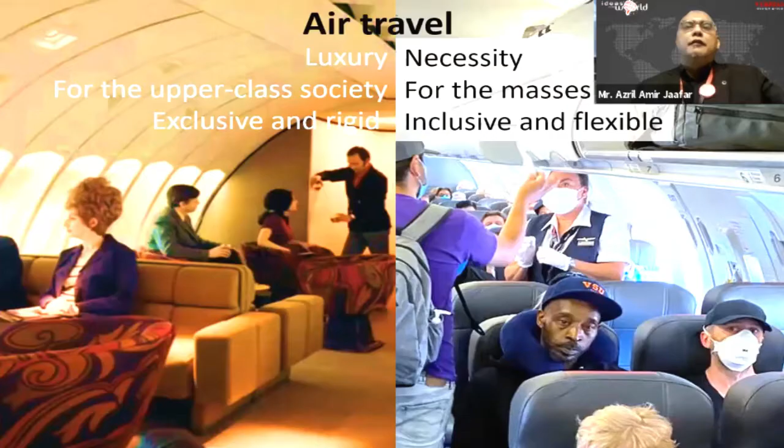Okay, first of all, just now the introduction says that we are based in Kuala Lumpur, and we also have offices in other parts of the world as well. And my India director reminded me before the session not to forget mentioning that we have an office in Mumbai. So yeah, now we have an office in Mumbai as well.

Right, basically, as mentioned, I tried to look at this presentation from a slightly different angle, I think a mass travel mode kind of angle. For example, the first picture that I showed on the screen now is a picture of a Boeing 747 upper deck, probably in the 70s or 80s when it was introduced to the market. I cannot see the whole screen. Anyway, it shows what air travel is all about in the past. It is about luxury, it is for the upper class society, and probably it is too exclusive, and perhaps it is quite rigid. You have to dress a certain manner to be on the plane in the past.

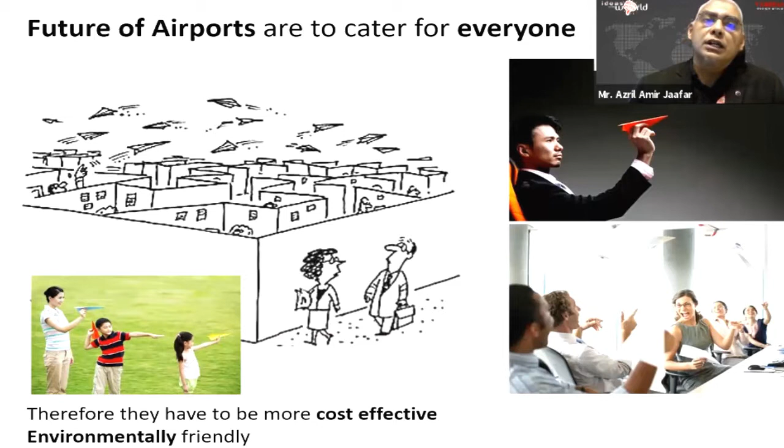Right, nowadays, air travel has become kind of like mass transport in certain countries. It has become a necessity rather, and it is for the masses. And it is more inclusive and quite flexible, actually. Okay, let's see the next slide. The future airports perhaps are to cater for everyone, for the masses, especially in a big country like India, where a lot of people need to travel from one state to another. So the airport has to be more affordable in terms of the operation and running, and it has to be, of course, environmentally friendly. And one of the ways, perhaps, is adopting a sustainable approach.

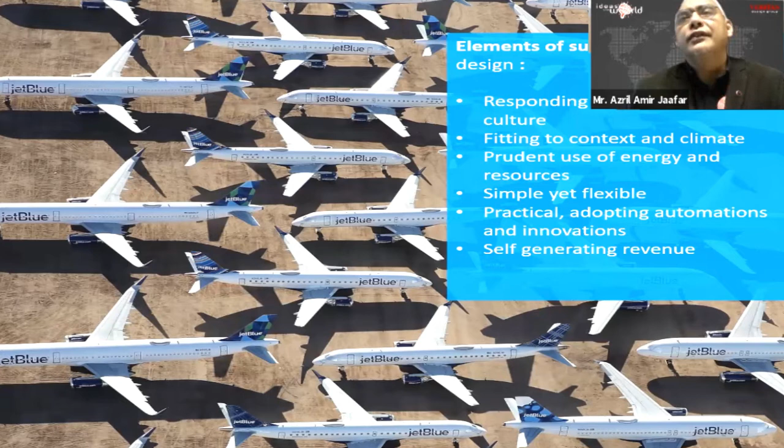Right. What are the elements of sustainability in airport design? I think these are the things that I can think of, and I listed them down for this session. First of all, it has to respond to time, users, and culture. The airport 20 years ago may not be the same now because aviation has changed a lot. Even aircraft preference has changed. The 747 used to be quite preferred in the old days, but nowadays airlines are looking into smaller planes, right? That also affects the airport design. And it has to fit to context and climate. You can't simply generate a design for certain countries. It has to be dedicated for that particular location and country as well.

And related to climate, we have to consider the prudent use of energy and resources. It can be luxury, but in a practical manner. And the most important thing is simple yet flexible, because you don't really build an airport every now and then. But the industry changes quite frequently, so the building itself, the space itself, has to be flexible to adapt to whatever the changes. And then, of course, practical.

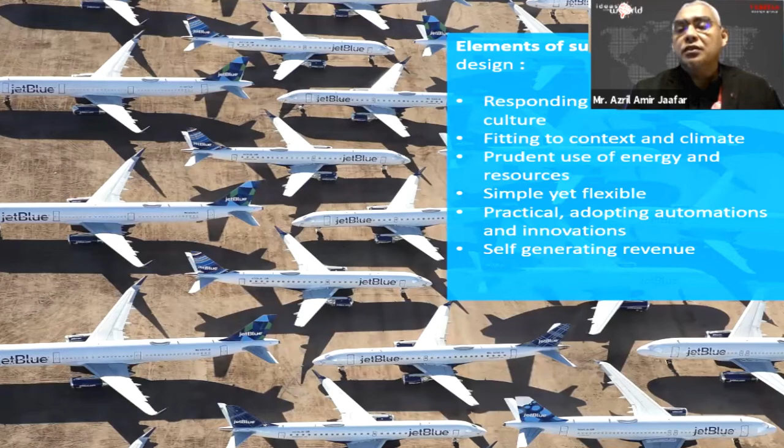I think a few panels mentioned the practicality of airport design, and it has to adopt automations and innovations. This is one of the important components in airport design, automation, because it involves a lot of processes, as well as innovations in terms of the operation. And one of the sustainability factors in airport design as well is self-generating revenue, because the airport, to a certain extent, has become a commercial center that needs to be sustainable in itself. Right. Let's look at the elements, because I will focus on low energy for this session.

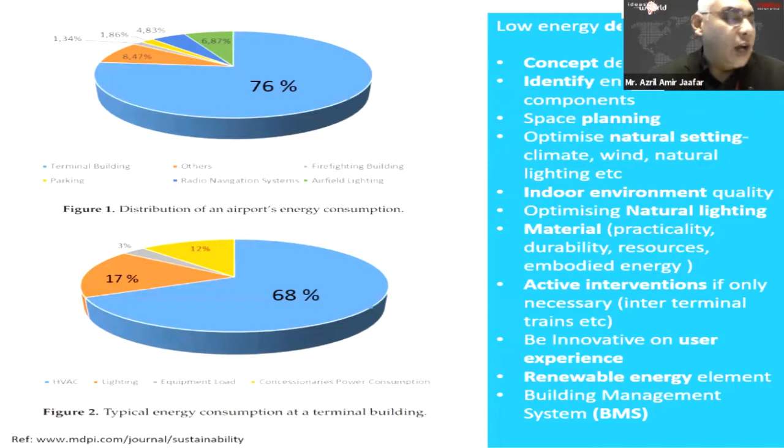The first chart here is about the energy usage for the overall airport compound. The terminal building takes up about 76% of the energy in the airport. The rest is for parking, firefighting and others, but the terminal takes up about 76%, meaning that if you can tackle this part of energy, you are saving quite a lot.

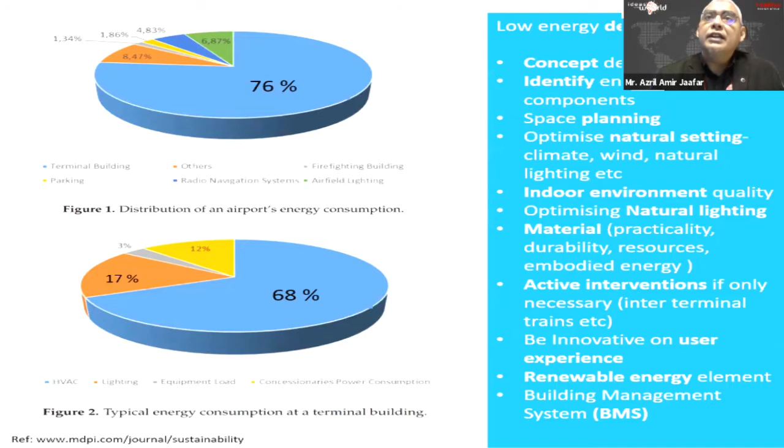So I listed down the design strategy when we are designing an airport. First of all, the concept design. You must have the right concept from the very beginning so that the airport can be rooted and memorable. I think Ms. Shivani also mentioned this a few times today. And then you have to identify the energy hungry components, like the air conditioning, and space planning. We have to challenge the space planning to improve the condition and the experience.

And of course, you have to optimize the natural setting, understanding the climate, the wind, natural lighting, etc. Another important component is indoor environment quality. An airport in Mumbai, for example, may not feel the same as an airport in Beijing. There's something about the airport that becomes memorable as far as the indoor environment quality is concerned. And another thing, of course, is optimizing natural lighting, because natural lighting can give a certain character to the spaces.

Material is another important component in low energy design. First of all, it has to be really practical and durable, because foot traffic in airports is enormous. And the resources, where you source the material. A lot of people mention getting local material today, and that is a good approach, because first, you give identity to the place, to the airport itself, and second, you minimize the embodied energy in the material itself.

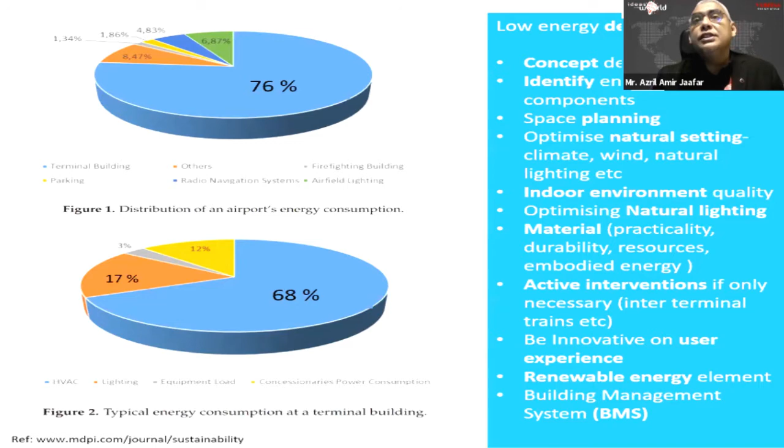And another thing is be innovative on user experience, because when you are experimenting or exploring different ways of designing an airport, you have to be aware of the user experience. And the airport is a huge building, with a lot of opportunity to harvest renewable energy from solar panels, for example. And of course, I mentioned earlier the building management system, the BMS, how you place sensors and all that to control the energy usage within the airport.

I just want to share with the audience the case study that we did in Kuala Lumpur. This is a huge low-cost carrier terminal. It is not for AirAsia actually; it belongs to Malaysia Airports, but the main user will be AirAsia. It is a 45 million passenger per annum airport, for domestic, international, as well as a small portion for transit. And we need to provide about 80 aircraft stands.

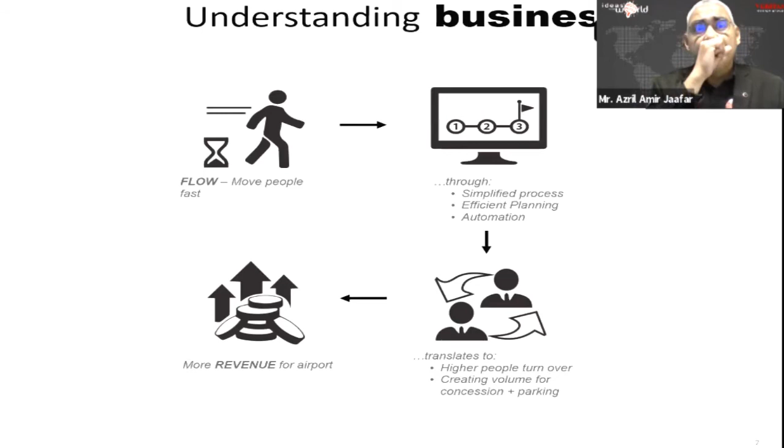First of all, we have to understand the model, because it is different from the normal network carrier or full service carrier. It is about flow, moving people fast through a simplified process, efficient planning, and automation. We need to spend on automation, because this will translate into higher people turnover, creating volume for concessions as well as parking. Parking is another revenue generation element in the airport, and of course, it will create more revenue.

And one of the concepts that we explored in this design is simplicity. An airport is a building where you can easily get lost. And basically what we were looking at is going back to the basics of airport operation.

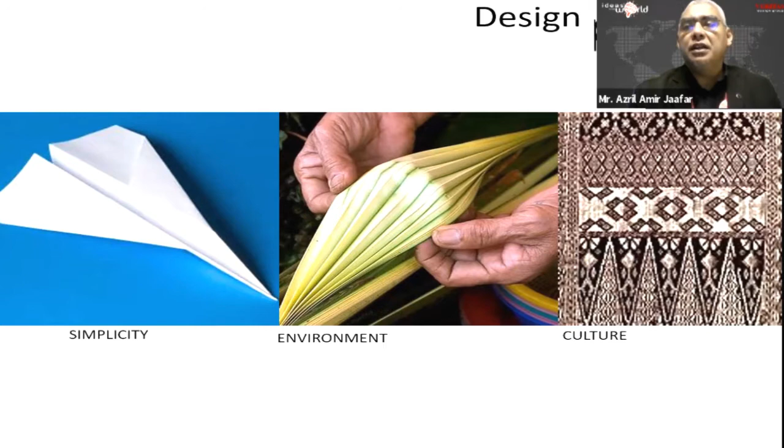So one is simplicity, and adopt the maximum potential of the environmental quality, environmental element into the design itself. The picture here is, I think, one of the tropical palm species that we adopt in the roof design. And then as well as looking into the culture, to create the identity of the airport.

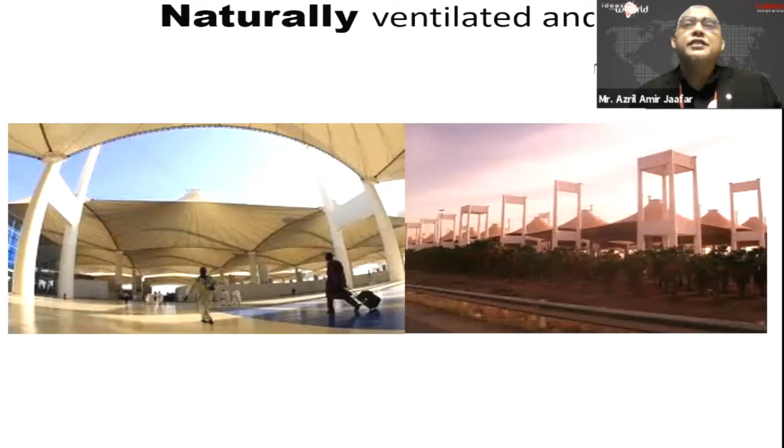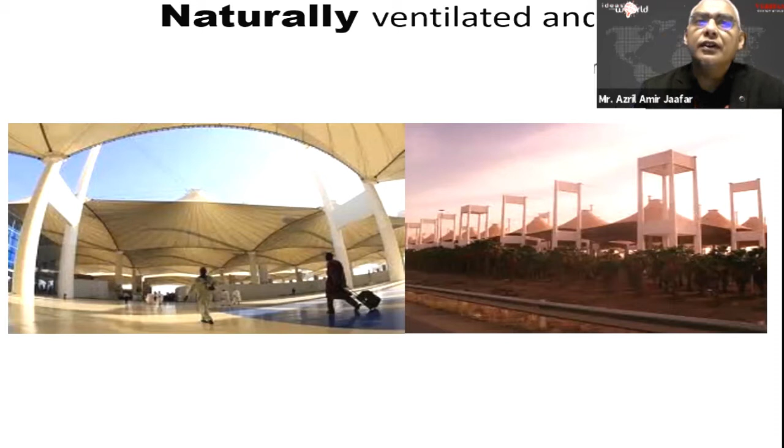Right. Talking about environment, we were looking at making it a naturally ventilated airport. I think a large portion of it is naturally ventilated. We look at the precedent of the Jeddah Hajj Terminal by SOM, completed in, I think, 1981. And talking about identity, it is inspired from the Bedouin tent. So I think this is how simple the concept is.

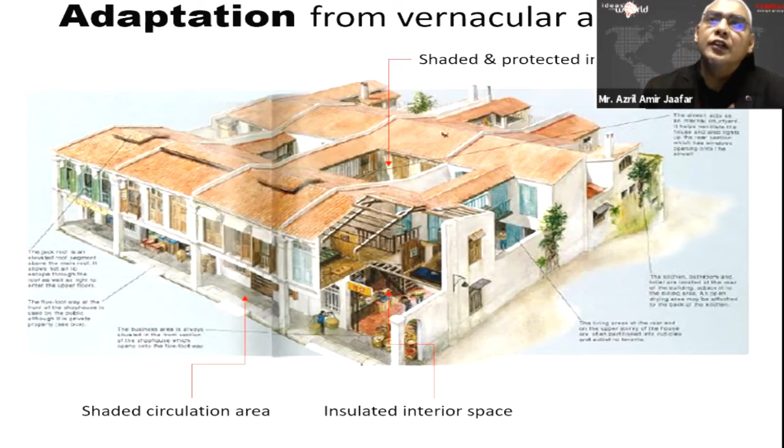Right. Taking all this information and digesting it, we start looking into the design of the airport. Basically, the first step is looking at the vernacular architecture within Malaysia or Southeast Asia. This is one of the building typologies in Malaysia. So the components of a shaded circulation area, insulated interior spaces, as well as the shaded and protected internal courtyard can be adopted in the airport design as well, because an airport is a building, so whatever works in the vernacular architecture might work in the airport as well, right?

Okay, so looking at the layout, basically it is very simple planning. The process area, one domestic wing and two international wings on either side. We were looking at incorporating a lot of automation at the processing area, because the idea is to move the people fast, and then flexibility at the next stage, which is the security, immigration, scanning, and all that.

And one of the flexibilities that we try to incorporate here is combining the domestic and international at one location. The advantage is you can share the resources and you can juggle the crowd. For example, when the domestic flights are more than international, you open up more counters for the domestic and adjust the movement accordingly. So this is, I think, the advantage. One example of being flexible or challenging the space planning.

And of course, another component in the layout is to create a different experience. I mentioned automation in the process, as well as minimal mechanical intervention. I'll show later how by adopting a passive design space planning strategy, you can actually minimize the mechanical intervention for the people circulation in the airport.

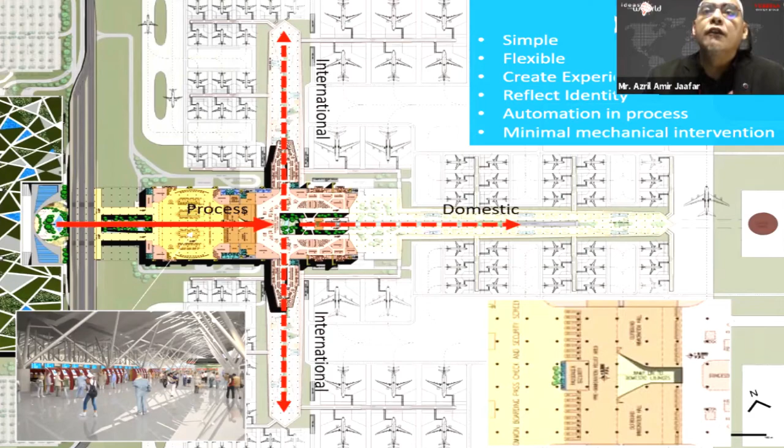Right. This is talking about the experience. I think earlier one of the panelists mentioned incorporating landscape design. I'm quite glad people are talking about incorporating plants or landscaping inside the terminal building, because you create experience, and of course an airport is a very long building, so you have to experience a lot of other things while you travel.

Okay, another challenge for designing an airport is the long walking distance. How do you manage that? Basically, we try to explore the possibility of creating different nodes, and by having different processes try to mitigate the long walk.

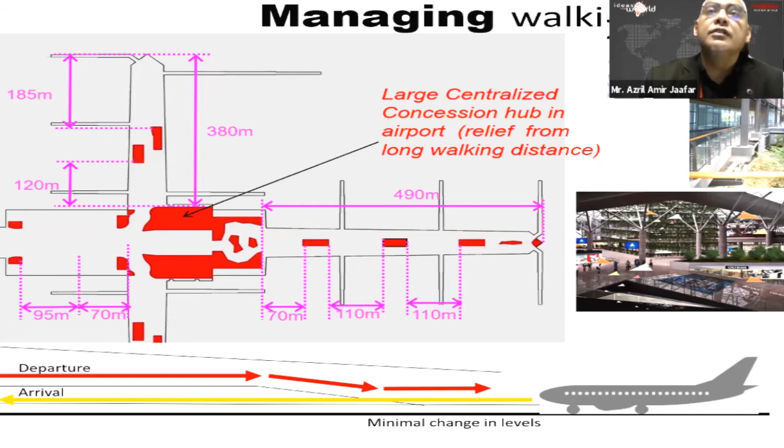Right. I mentioned earlier that I will focus a lot on naturally ventilated space. Only about 30% of the area within the huge building is mechanically air conditioned. So the rest is naturally ventilated, of course, with assisted air movement by industrial fans and all that. I have tried this in other huge buildings as well, and it works. I believe it can work in the airport.

Mr. Jaafar, sorry to interrupt you. We are running short of time, so if you can conclude. I will, I think I'm almost there.

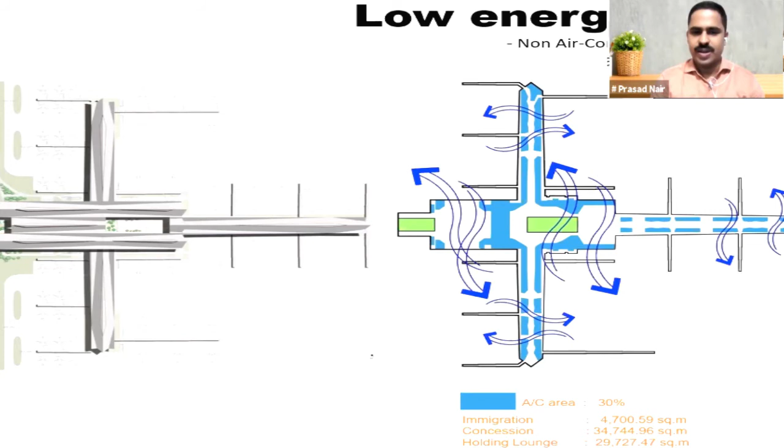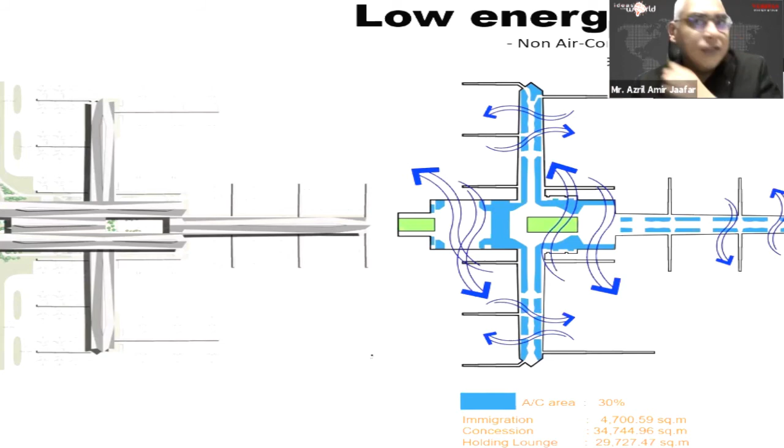So basically, only 30% of the area is air conditioned, so it helps a lot. If you remember earlier, HVAC takes up quite a lot of energy in the airport. Okay, other low energy solutions are controlled natural lighting, good insulation for the roof, cross ventilation, and shaded thermal buffer. It's kind of like a shaded thermal buffer around the air conditioned area.

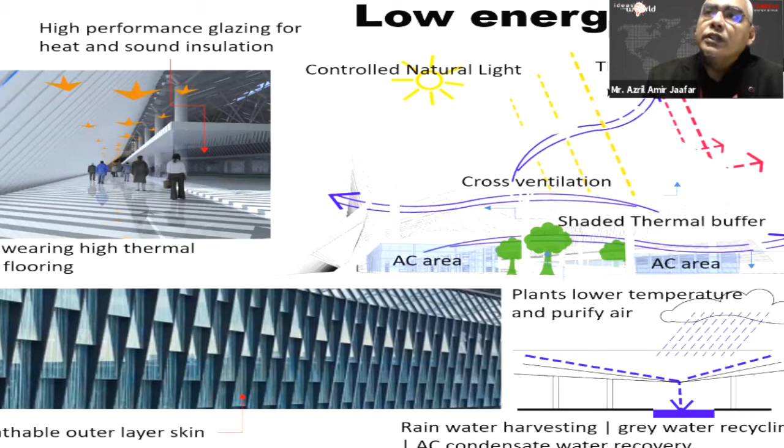And as far as water is concerned, we can adopt rainwater harvesting, grey water recycling, air conditioning condensate water recovery, as well as materials. Obviously airports need high performance glazing for noise insulation as well as heat insulation. And then the flooring, high thermal mass, because thermal mass will be shaded and cool down the ambient temperature in the building. And this is an example of the breathable outer skin that allows air to come in while preventing rain from coming in.

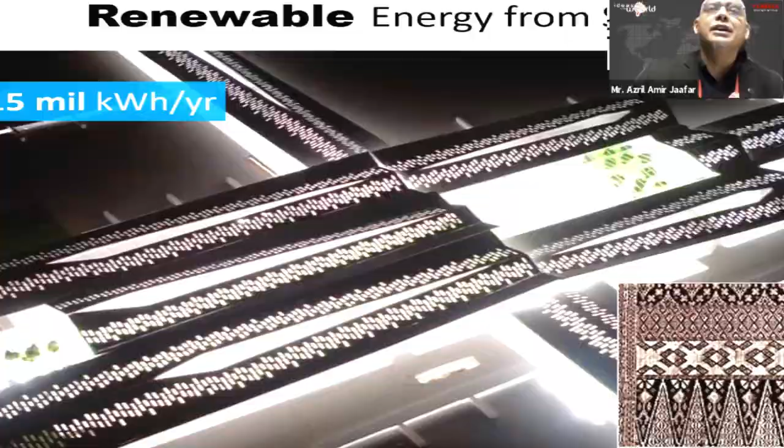Okay, another component is renewable energy. Solar from the roof can generate about 15 million kilowatt hours per year, and the pattern of the solar panels can resemble the Malaysian fabric, songket, if you are aware of it. Okay, this is the last slide.